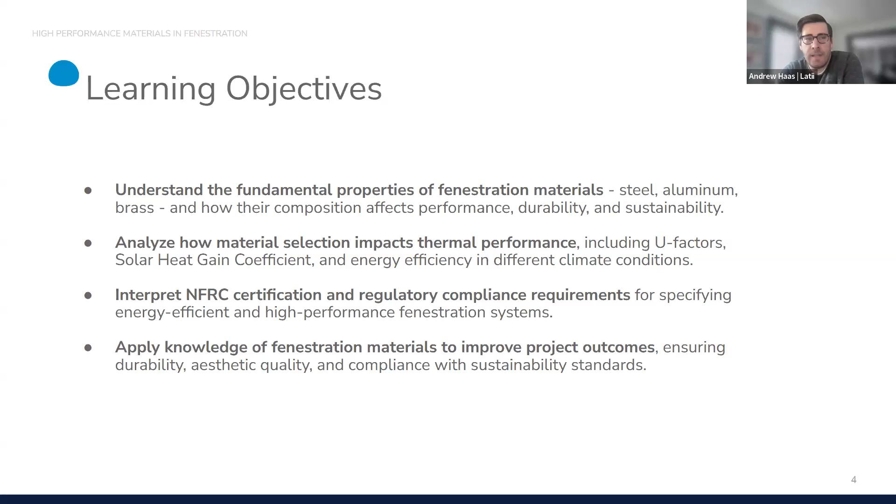We're going to interpret NFRC certification and go through what that means and what's measured for being compliant. And then we're going to look at how you can apply this knowledge to improve project outcomes within your designs. So why metal fenestration?

It really is an amazing thing to have metal windows and doors in projects. It's something that's different than other materials because they age and patina with time, and it really changes and grows, or changes its appearance and feel over time through the life cycle of the building.

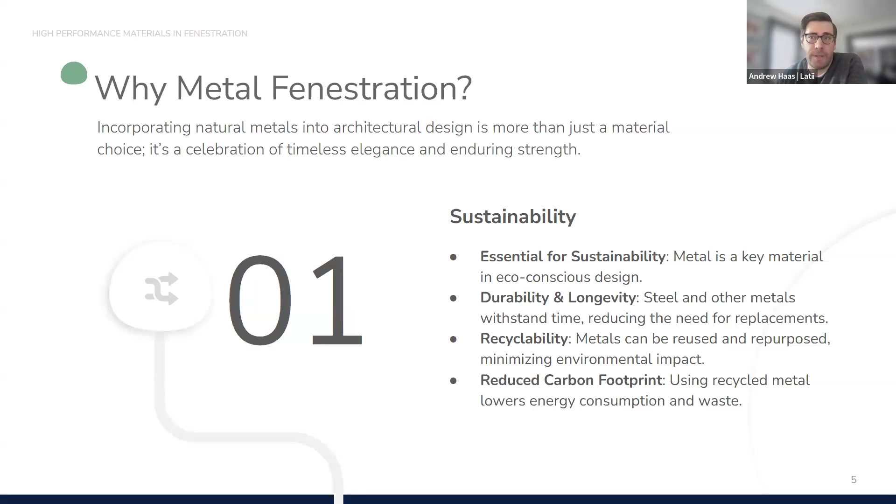So it's a really great material because it can be an eco-conscious design for sustainability. It's very durable and has a long longevity. It's highly recyclable, and by using recycled metal in our products, we reduce the carbon footprint that they have. They're also very beautiful.

There's kind of a dynamic aesthetic that evolves over time throughout the whole project itself. So on one side of the building, it might age and look a little bit different than on the other side of the building, which is kind of a romantic and nice aspect of the patina over time.

It offers consistent performance, so its uniform composition ensures reliability across applications, and natural metals blend beauty with durability, meeting the highest standards of craftsmanship.

It's also naturally corrosion resistant. They develop a protective patina over time that enhances the durability and aesthetics of the project.

It has long-term integrity. It doesn't crack or warp or deteriorate with age like other materials. It's very low maintenance while maintaining its structural performance, and it becomes more robust and beautiful over time.

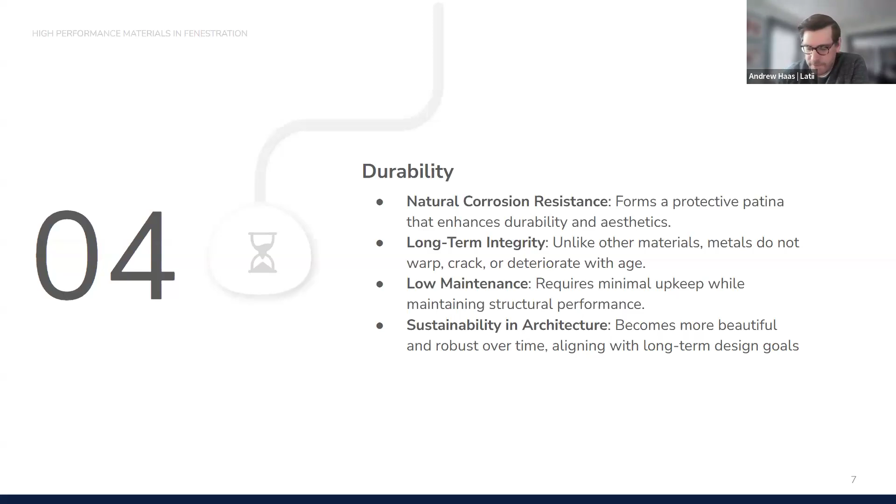Steel is known for its exceptional structural strength and high load bearing capacity, making it ideal for large window and door openings. You can see here the MAXXI Museum made with Secco materials in Rome, Italy by Zaha Hadid.

Its high tensile strength ensures that it can support heavy loads. It allows for thinner profiles compared to aluminum and brass, which maximizes the amount of glazing area without compromising structural integrity. Its rigidity makes it particularly useful in high wind zones or seismically active regions where material flexing can be problematic.

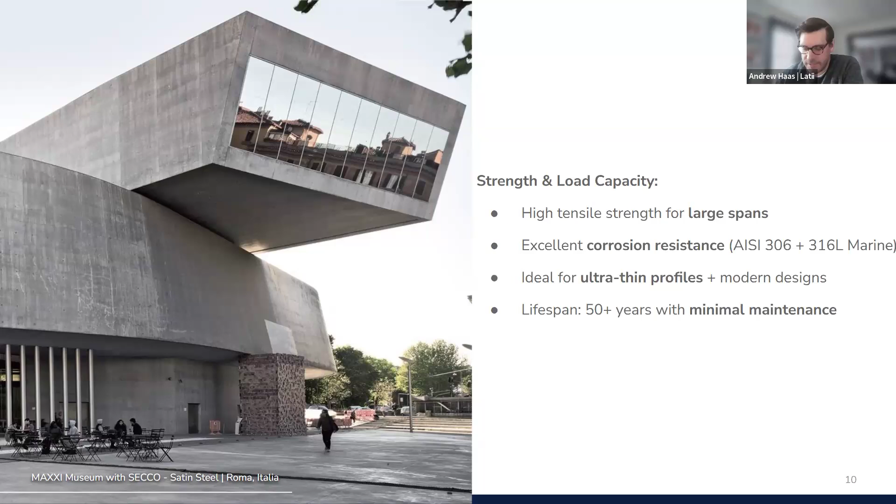Looking at the composition of steel, it's a dense and heavy material, typically weighing 2.5 times more than aluminum. Due to its weight, it requires reinforced structural support for installation, making it less suitable for projects where lightweight construction is a priority.

However, the weight results in higher transportation and handling costs compared to aluminum, requiring a more labor-intensive installation process.

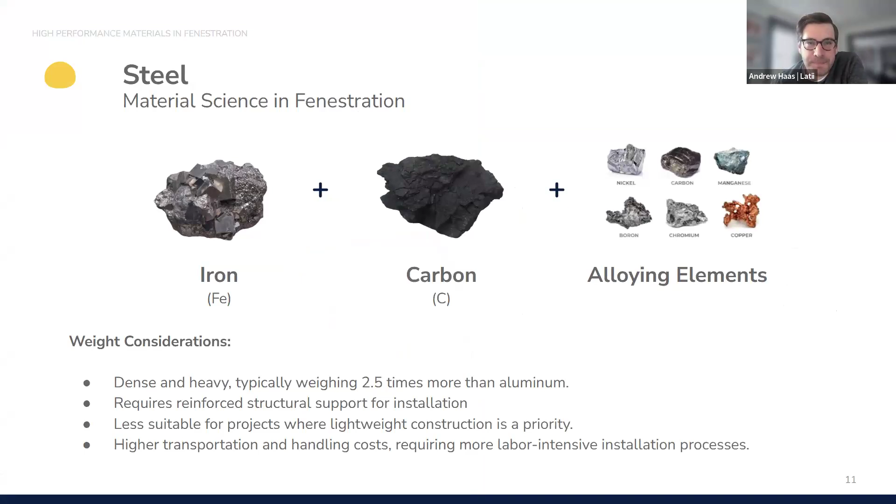Steel is highly durable. It often lasts for more than 50 years if properly maintained. It's corrosion resistant - all the products we offer are galvanized and powder coated or stainless steel to prevent long-term deterioration.

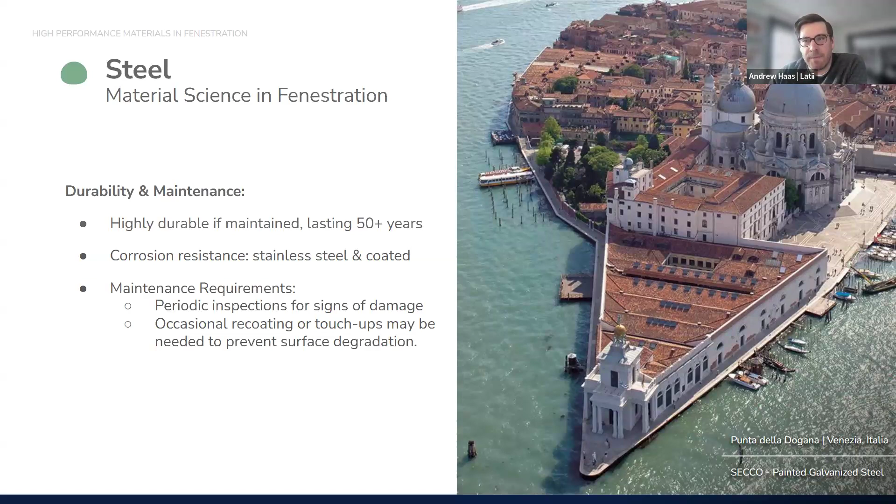Steel windows and doors sometimes require periodic inspections, particularly in coastal and humid environments where salt exposure can cause damage. Coated and stainless steel options reduce maintenance requirements, but there's some occasional recoating or touch-ups that may be needed to prevent surface degradation.

So steel strength offers large vistas to the outdoors, blending domains between spaces and lighting up the room with life and beauty.

Next, we'll move into aluminum. Here's a project by Francisco Artigas - this is our showroom down in Mexico City that was renovated a few years ago with all of our aluminum products.

Aluminum offers moderate strength, which makes it suitable for most standard window and door applications, particularly in residential or low-rise commercial settings. It's not as strong as steel, so it can't support as much weight without reinforcement.

To compensate, aluminum systems often incorporate additional structural elements or thermal break reinforcements like what we offer, especially for large spans in buildings. Because of its lower strength to weight ratio, aluminum tends to require slightly larger framing, but it still doesn't largely impact sight lines like other products do.

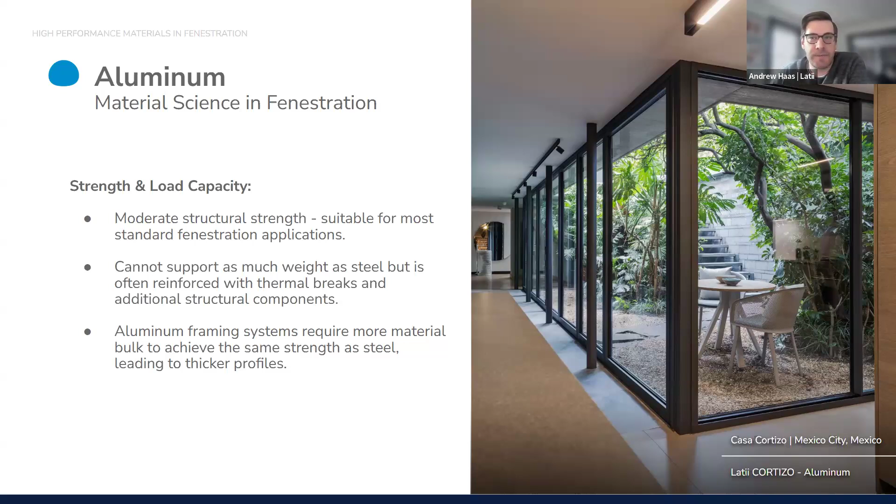So aluminum is extremely versatile. It's important to understand the trade-offs between profile size and structural capacity, which our team can help you with throughout the design process. A little bit about the science of aluminum.

There's some big advantages to its lightweight nature, especially compared to heavier metals like steel and brass. Because it's so much lighter, it's easier to transport, handle on site, and install, which translates to savings in both labor and time.

It also reduces structural load demands, making aluminum ideal for retrofit projects or historical preservation projects where weight may be a concern. Additionally, reduced weight can mean lower shipping costs and faster installation times.

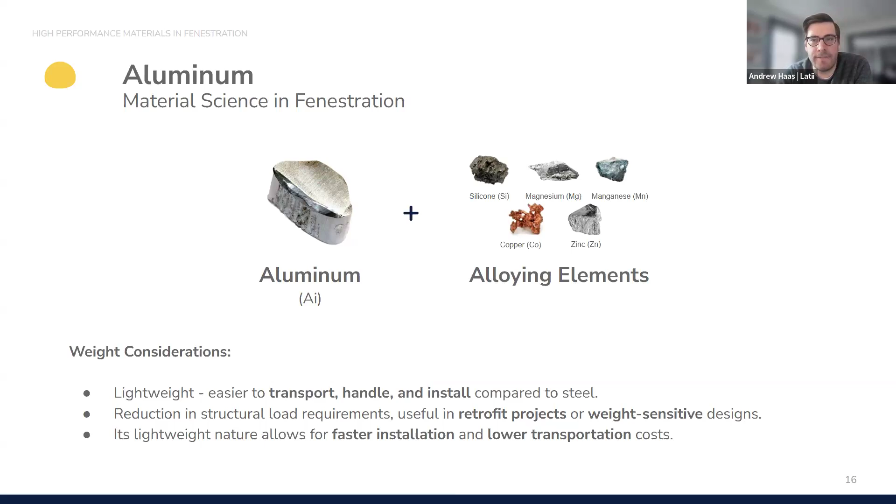Aluminum is naturally corrosion resistant. It performs or forms a protective layer when oxidized to the air, or when exposed to the air, preventing rust and expanding its lifetime. The lifespan of aluminum is typically 30 to 40 years, with minimal maintenance required.

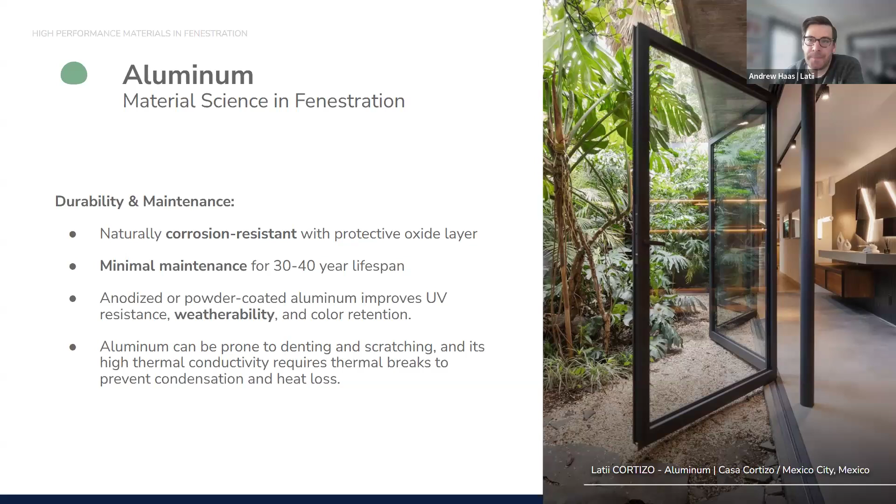Surface coatings are typically anodized or powder-coated aluminum, which often improves UV resistance, weatherability, and color retention. The only real maintenance needed is occasional cleaning to remove dirt and environmental pollutants that may have attached to it. One other consideration is that aluminum can be prone to denting and scratching, so that's important to consider.

And now looking at brass, here's the Venice Hotel made with Secco brass products. Here's the interior, you can see it's a polished brass.

Brass sits between aluminum and steel when it comes to structural performance. It's stronger and more rigid than aluminum, giving it better dimensional stability, especially for custom or intricate profiles. However, it doesn't match the load-bearing capacity of steel. Brass really excels within specialty projects that demand both performance and high craft. You'll most often see it in historical preservation projects, premium architectural accents, and decorative detailing for high-end residential, luxury retail, and cultural projects. Brass is a great material because it combines longevity, strength, and elegance, balancing both aesthetics and durability over time.

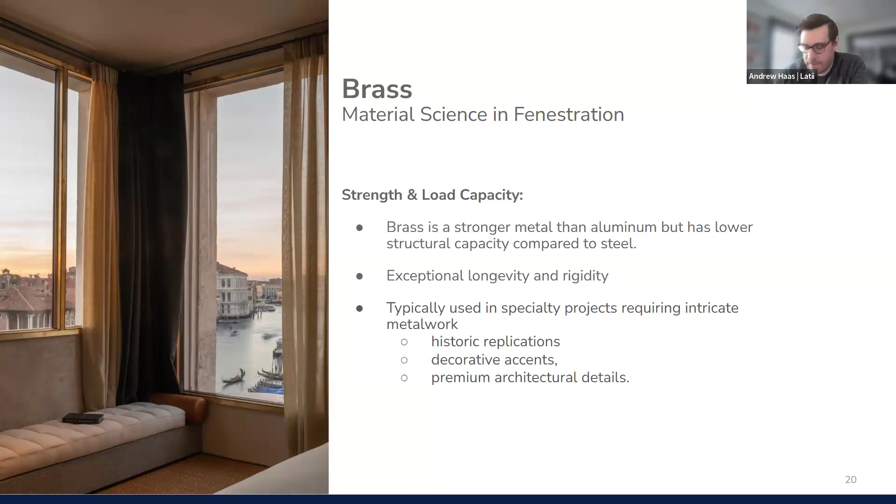A little bit about the chemistry of brass: it's heavier than aluminum, but slightly lighter than steel. Because of this, larger window and door assemblies in brass require additional structural support, which our teams can help with. Brass is typically made of about 67% copper and 33% zinc. So while brass adds a bit more weight and complexity to installation, it offers great longevity and aesthetic quality and character in projects.

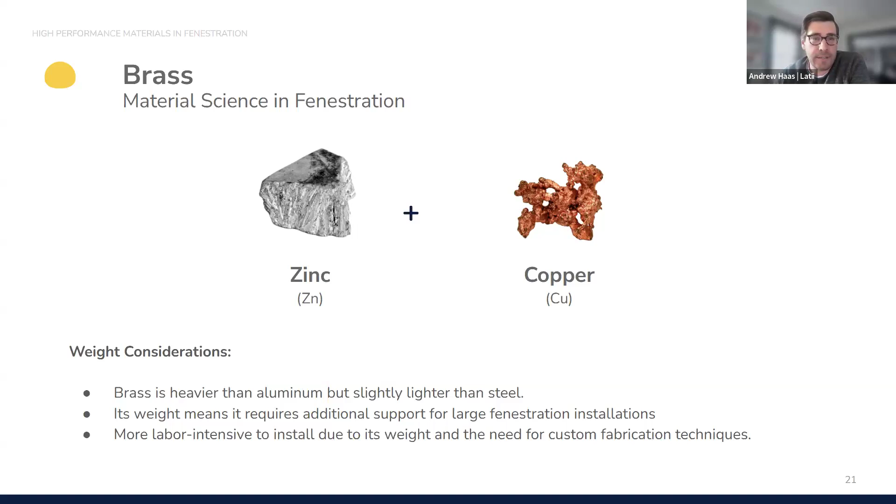Brass is one of the most durable materials available for architectural fenestration. Its performance really lasts and shines over time. It offers exceptional corrosion resistance, which is great for coastal or high humid climates. One of the great characteristics of brass is how it patinas over time, developing a rich surface that enhances its appearance while also acting as a protective layer, shielding the metal from environmental wear. So in many ways, the patina is a great feature, not really a flaw.

Brass is also very low maintenance. It doesn't need to be painted or coated. And there are different looks you can achieve, whether it's bright and polished, or if you like the burnished patina over time.

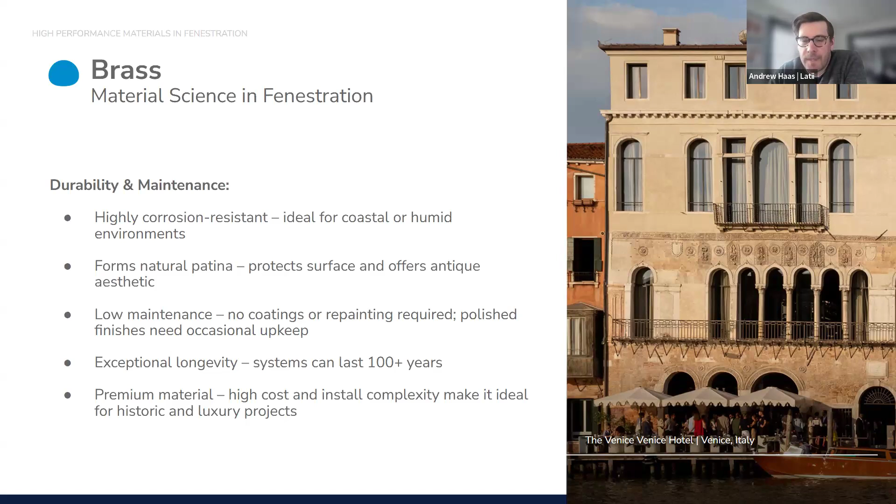Brass windows and doors can last for over 100 years with minimal intervention or upkeep needed. It's a really long-lasting building material for premium projects. It is a luxury material with high upfront costs, but the longevity of the material reduces its need to be replaced over time.

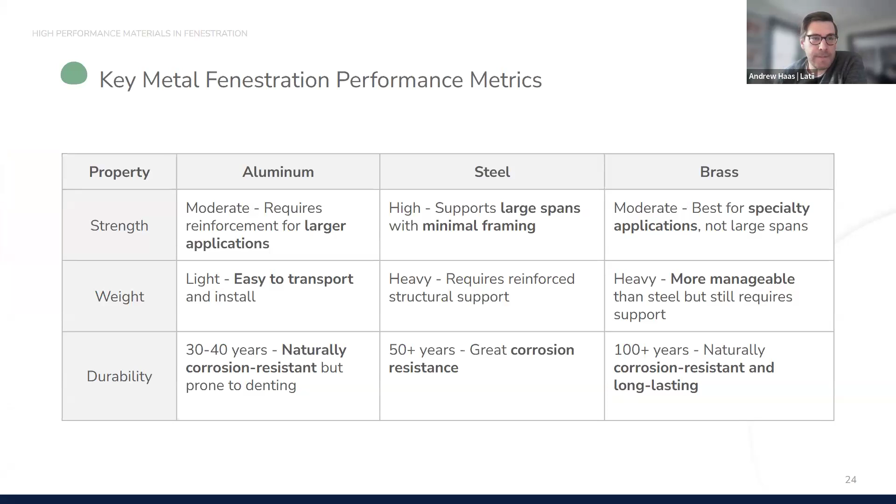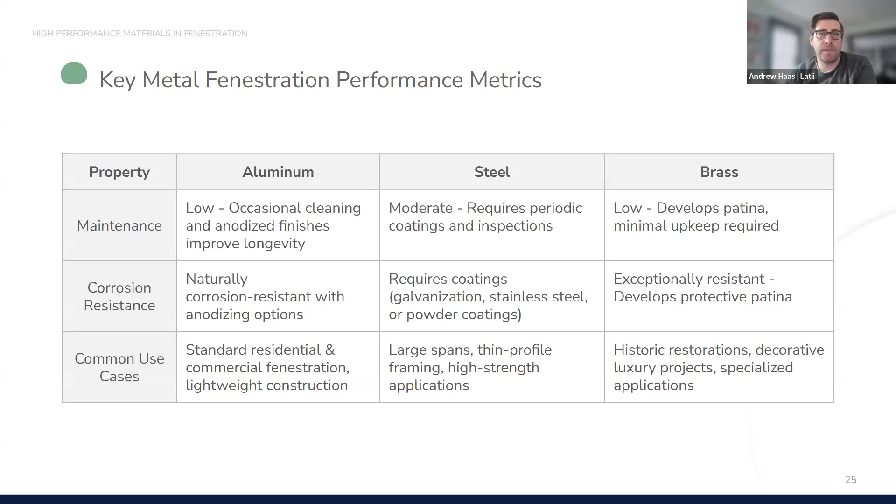Just some key performance metrics to consider: all of these materials excel in different ways, whether it's steel for very large spans with minimum framing, aluminum, which is great for weight-conscious projects and ease of installation, or brass, which is great for corrosion resistance and long-lasting performance. They all have different maintenance properties and corrosion resistant properties, so there are a lot of different common use cases for these different types of materials.

So let's look at the life cycle analysis and sustainability of these materials. Steel performs really well in aspects of its recyclability. It's 100% recyclable, and there's a well-established global recycling infrastructure for handling and reusing it as a building material. Recycling steel offers significant energy and carbon savings compared to producing new steel from raw materials.

Using recycled materials requires about 75% less energy than raw material. Steel has a very high strength to weight ratio, making it very strong, so less material is needed to achieve the same structural performance. It helps optimize resource use by reducing both material consumption and transportation emissions. It still carries a moderate embodied carbon impact, particularly during its initial production, but this carbon is typically offset over its long lifespan, since the windows can last for 50 years or more, requiring less replacement.

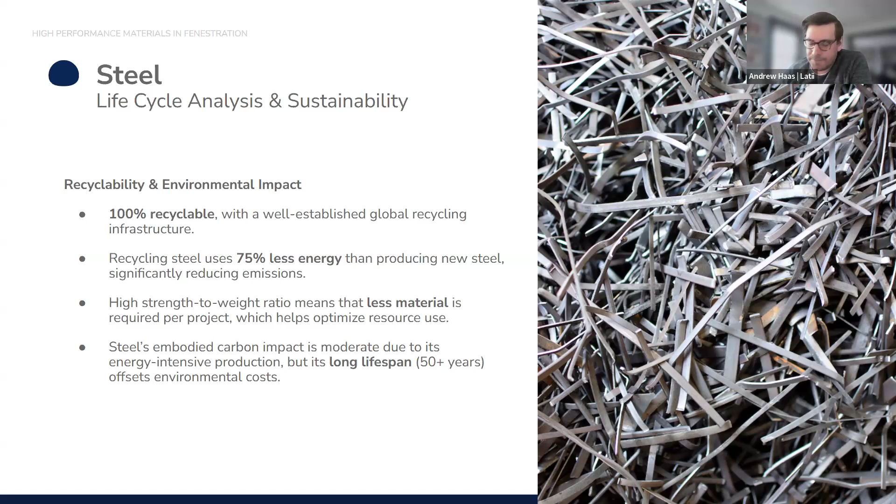For its embodied carbon considerations, steel can have a significant footprint in the initial production stage, but most steel is commonly recycled from scrap materials, and when using scrap materials, it can reduce emissions by more than 50%.

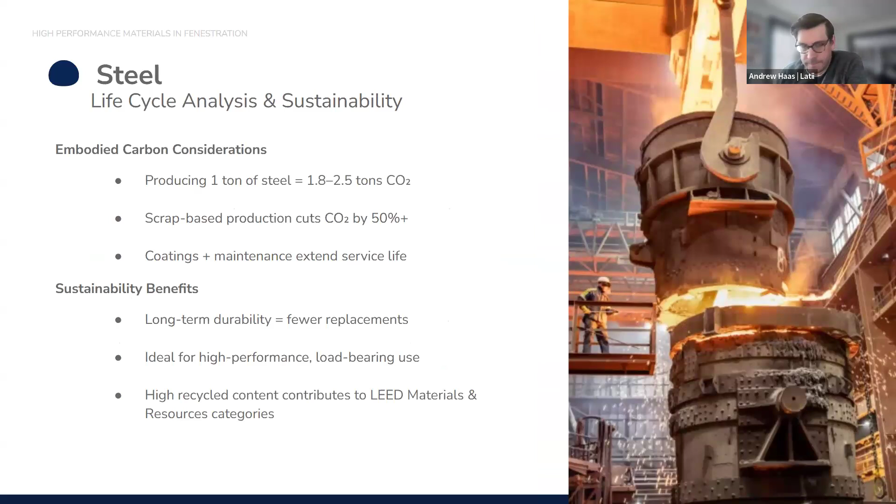Looking at aluminum, it's also one of the most sustainably recycled materials in the built environment, especially for facade and fenestration systems. Roughly 95% of aluminum used in buildings is recycled at the end of its life. The great thing about aluminum is that recycling it only uses about 5% of the initial energy required to produce it from raw materials, saving 95% of the energy needed.

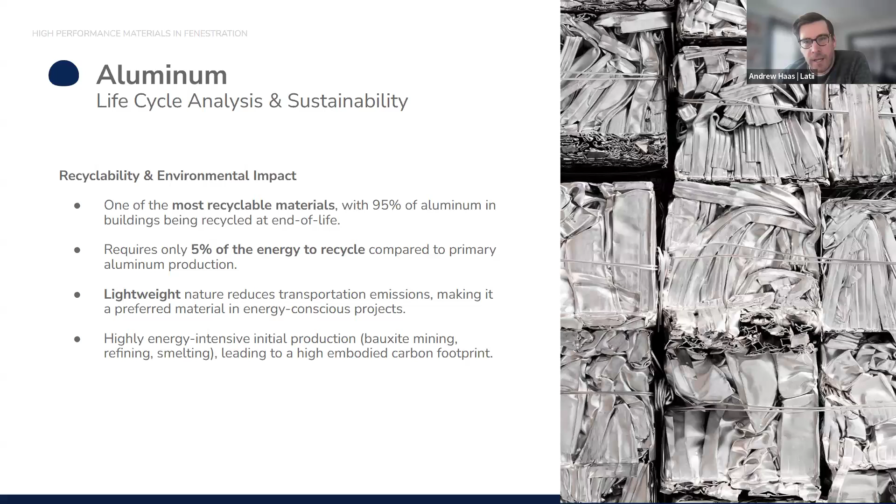Its lightweight nature also contributes to reduced transportation emissions, and it's one of the best materials for long-term environmental impacts.

Raw aluminum has one of the highest embodied carbon footprints among materials. Producing just 1 ton of primary virgin aluminum emits roughly 8 to 12 tons of CO2, so it's a lot more than steel or brass.

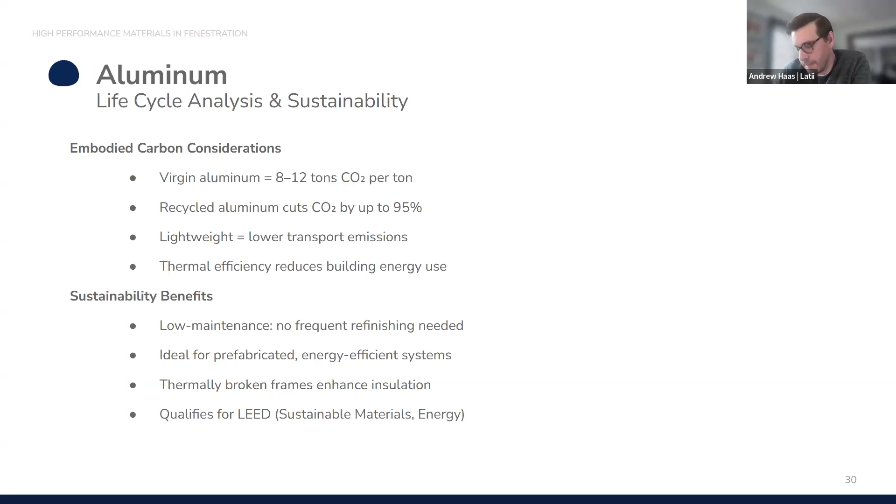It's very lightweight in nature, reducing the consumption of fuel for transportation, and typically having them be thermally broken also increases its strength, so you can reduce the amount of material needed.

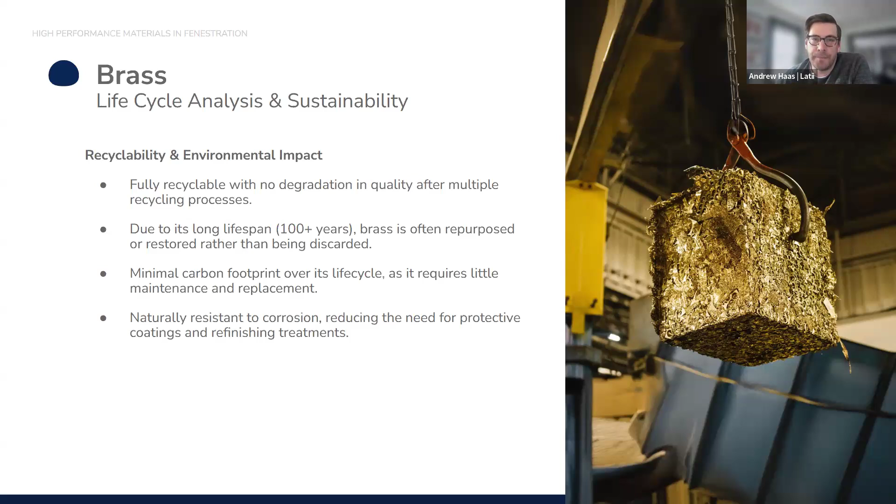Brass is a highly sustainable material when you look at its full life cycle performance. It's fully recyclable with no loss of quality, even after multiple recycling cycles, making it really suited for high reuse. Because it's so durable, a typical lifespan can be 100 years or more, and it's often repurposed or restored rather than discarded. The life cycle carbon footprint is relatively low, with a long service life and low maintenance needs. Since it's also highly resistant to corrosion, it reduces the need to repair and replace.

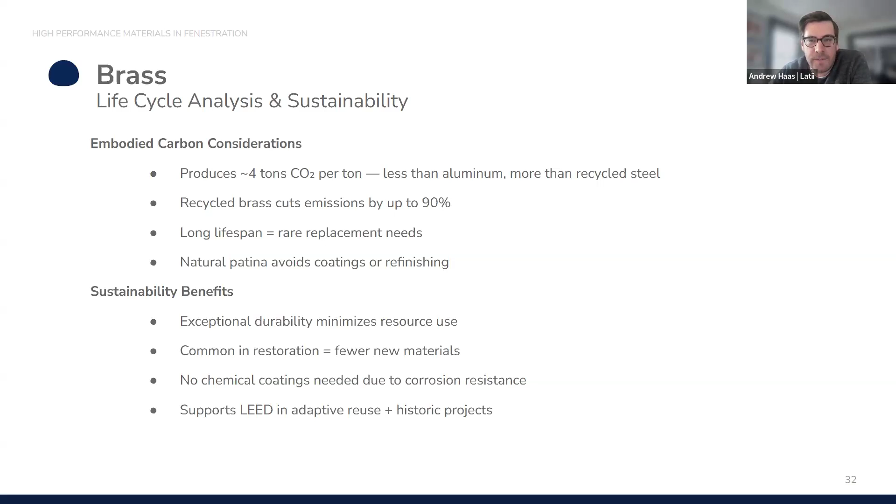Some embodied carbon considerations: it emits 4 tons of CO2, significantly less than aluminum, but still more than steel. It's highly recyclable and highly durable. Its natural patina helps protect it, and the aesthetic aging process reduces the need to replace it over time.

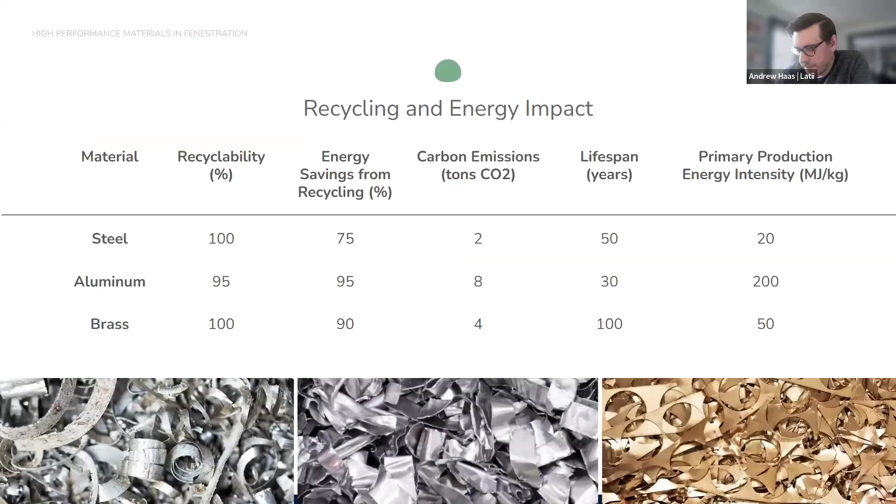Looking at them all, they have some similar characteristics. Steel is 100% recyclable, aluminum is roughly 95% recyclable. So there are a lot of different trade-offs and considerations for the sustainability aspects of these products.

Looking at energy efficiency and building performance now, fenestration is one of the most impactful elements of the building envelope when it comes to thermal performance, often accounting for 30 to 40% of the building's total heat loss or gain. If these systems are poorly designed or installed, HVAC systems have to work harder to compensate for this energy loss, leading to higher energy bills.

You can get condensation, and occupants can experience drafts or thermal discomfort if the fenestration isn't properly spec'd or installed. So material selection and proper frame detailing with thermal breaks can help increase the performance of these systems.

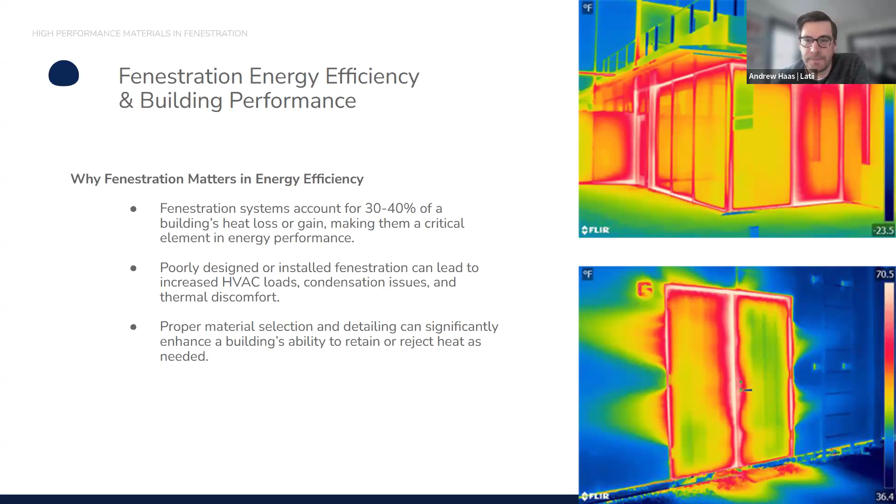Looking at the conductivity of these materials: steel has high thermal conductivity, which means it transfers heat easily. On its own, it's a poor insulator, but our systems all have proper thermal breaks, which help make it more energy conscious. Aluminum is also a very conductive metal, typically paired with insulated glazing units and advanced low-E coatings to manage thermal transfer and reduce energy loss. Brass performs moderately - it's more conductive than insulated materials, but less than steel or aluminum. It also offers some passive thermal stability.

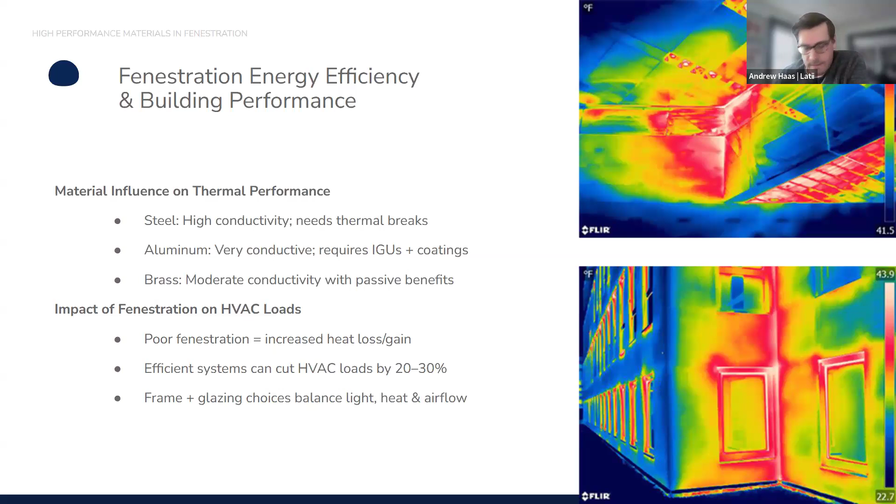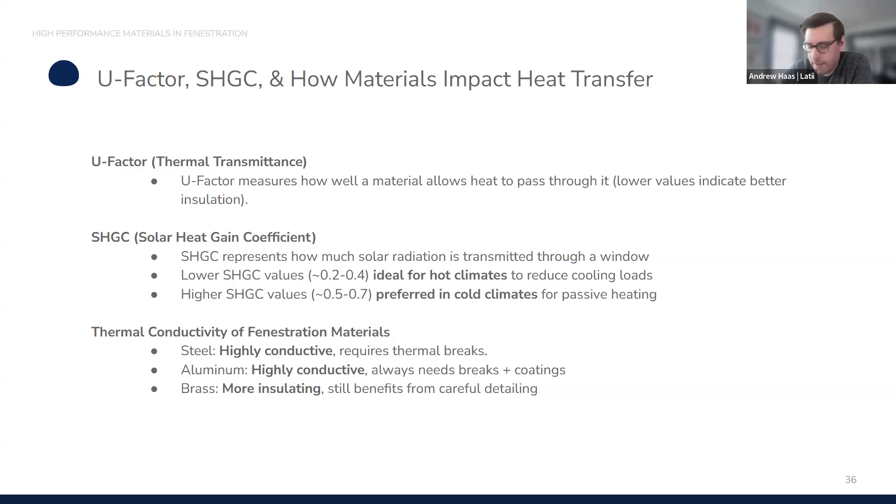Looking at the terminology we'll be talking about, first we're going to look at U factor - this is like thermal transmittance, so it measures how well a material allows heat to pass through it. We're also going to be talking about solar heat gain coefficient, which represents how much solar radiation is transmitted through the window. And then lastly, thermal conductivity - looking at how conductive these materials are with energy.

One of the great things that the Lati products offer is they're all thermally broken windows. Thermal breaks are low conductive materials that are inserted between the metal frame sections to reduce heat transfer from one side to the other. It's essential for steel and aluminum, and we also have it in our brass systems as well.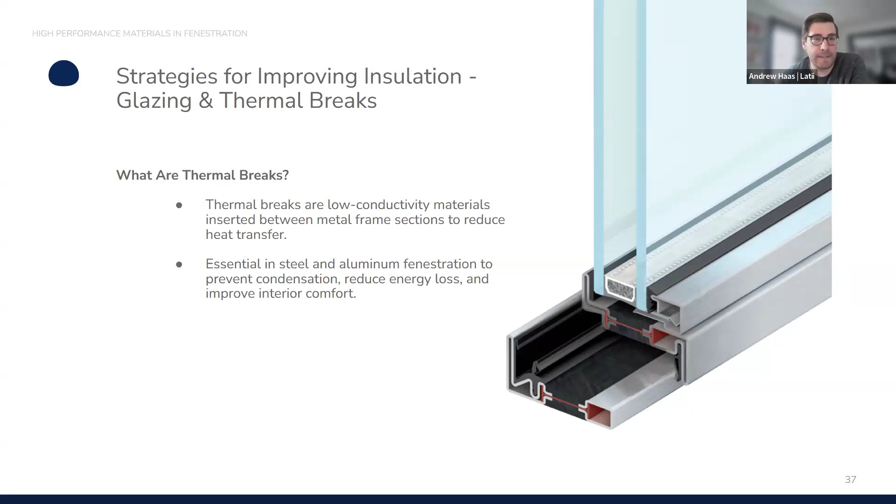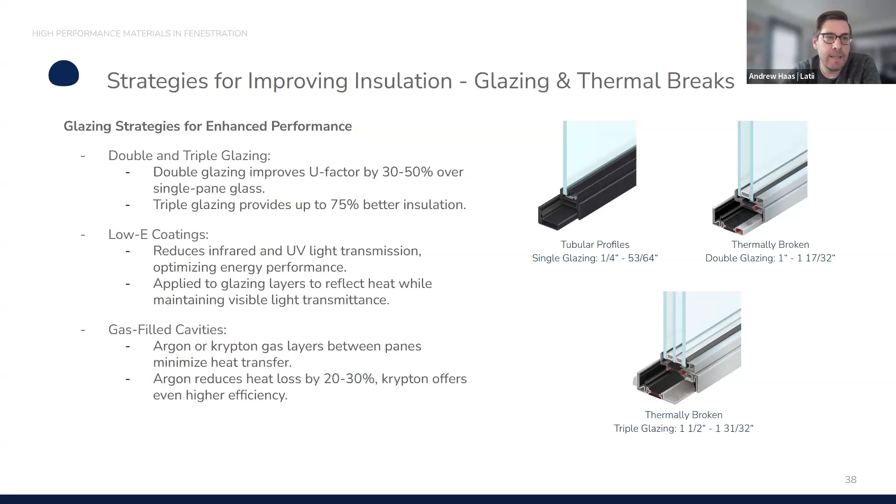Another strategy for thermal performance is looking at glazing strategies. We offer single, double, and triple pane options for glazing. We also have low-E coatings that reduce infrared and UV light transmission, and we also have different gases that are filled in depending on the performance requested by the architect.

Now we'll go into NFRC certification ratings and why it's important. The NFRC ratings are set up by the National Fenestration Rating Council, which organizes and sets standards for performance ratings for fenestration - windows, doors, and skylights. It's independently verified, required for Energy Star labeling, and widely recognized by programs like LEED and Passive House.

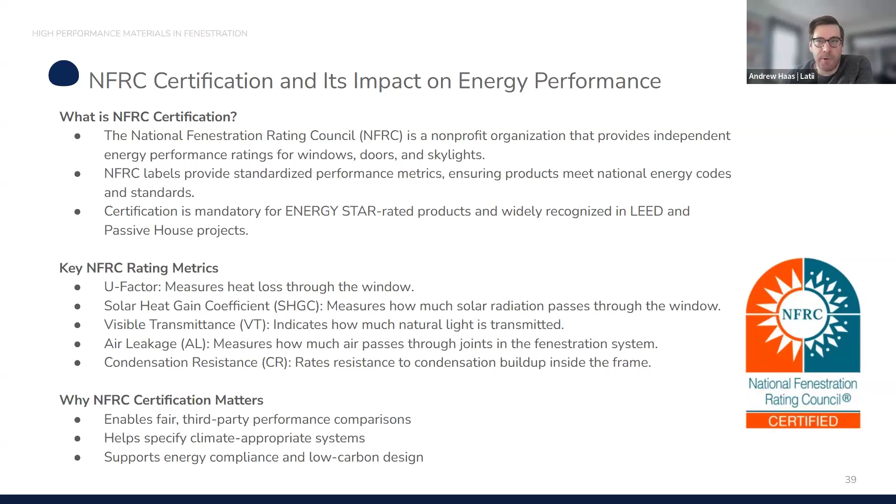So how do you break down what the label is saying? When you're looking at the U factor, lower numbers mean better thermal insulation. When you're looking at the solar heat gain coefficient, you want to see what's best for the climate you're building in. For visible transmittance, we're looking at how much daylight passes through the window. And then air leakage indicates how airtight the product is.

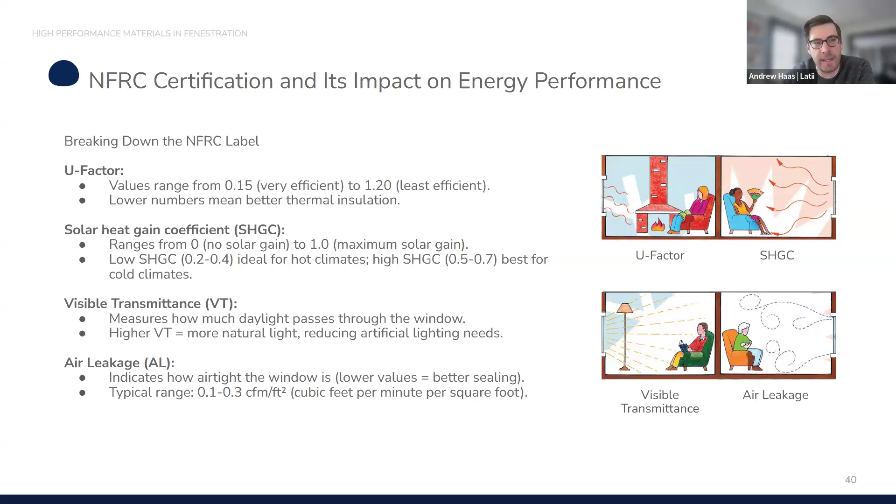So there's different zone considerations based on where your project is being built. In a northern zone, your goal is to primarily retain heat in the winter and take advantage of passive solar gain when possible.

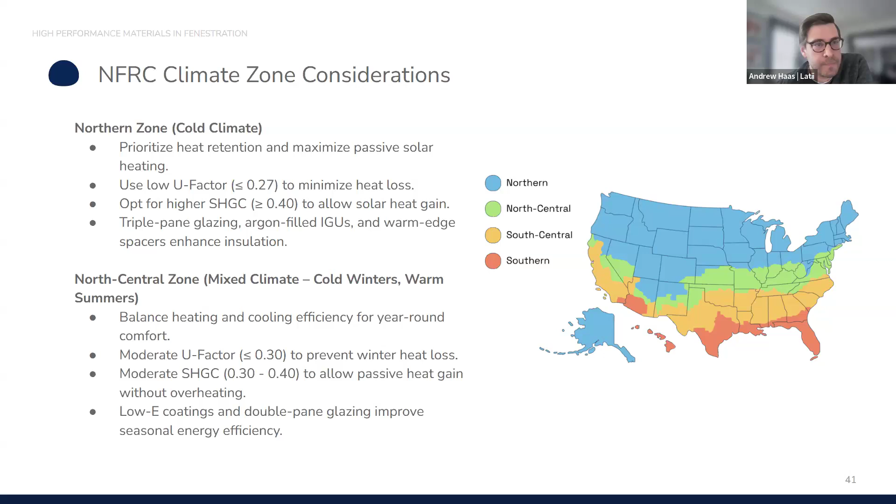For the north central zone, it's more balanced with cold winters and warm summers, where fenestration needs to perform well year round. In the south central zone, you have intense summer heat while still needing enough insulation for milder winter months. And for the southern zone, the climate can be both hot and humid, often year round.

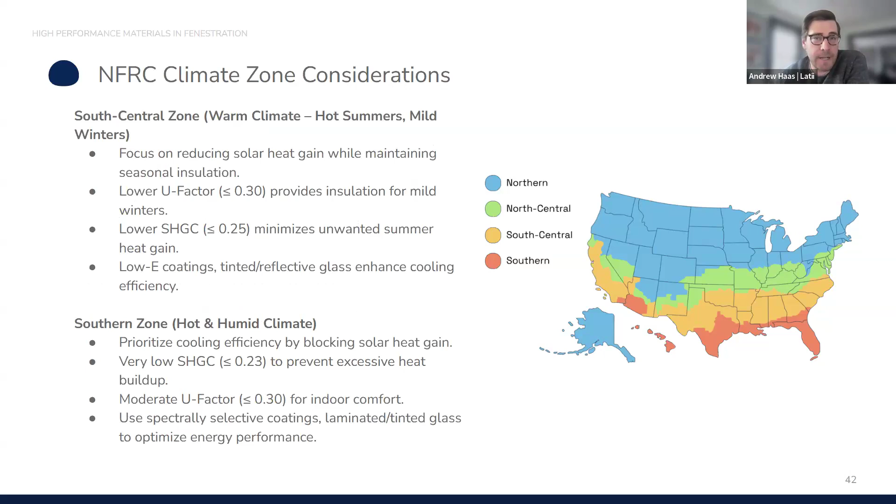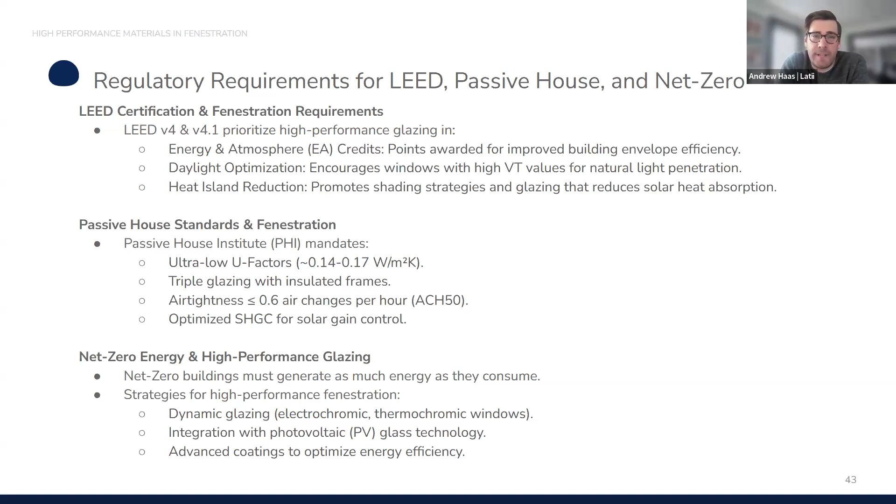Looking at the regulatory requirements for LEED, Passive House, and Net Zero, there are aspects you can consider for energy and atmosphere, daylighting optimization credits, visible transmittance, and heat island reduction.

Now, what's the best practice for selection of these materials? The first would be trying to understand aesthetic and design intent. For steel, sightlines offer thin, slight profiles and large spans, making it great for modern and historical preservation projects.

Aluminum is lightweight, corrosion resistant, and available in a lot of different finishes, making it great for high-rise and commercial buildings. Brass has a distinctive luxury aesthetic that ages over time, which is great for historic preservations, high-end residences, and luxury retail.

When looking at structural performance and load considerations, steel has the highest load-bearing capacity. Aluminum is moderate in strength but can be reinforced for larger spans if needed. Brass is durable and heavier than aluminum, which requires proper surrounding support.

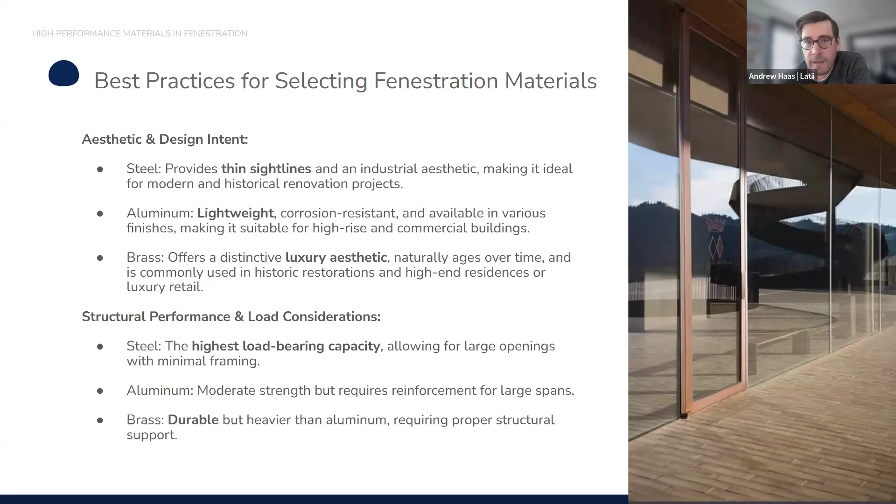Looking at environmental conditions and climate suitability, coastal environments require high corrosion resistance, so stainless steel, anodized aluminum, or brass work best. In extreme climates, you want to use high performance glazing as well to reduce heat transfer and increase longevity.

All of our steel products are AISI 306 and 316L marine stainless steel, which offer very high corrosion resistance. Aluminum is also naturally corrosion resistant, but can benefit from being anodized or powder coated. Brass develops a great patina over time, reducing its maintenance, but might require other upkeep if you want to keep it polished and bright.

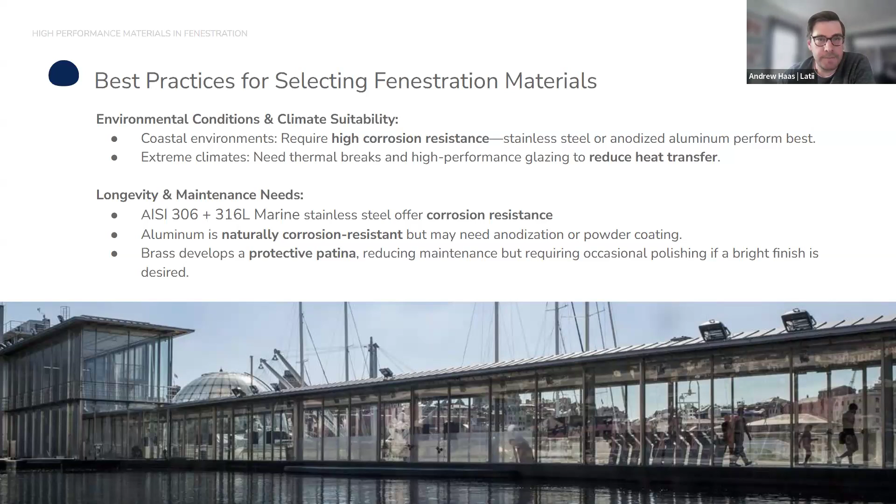All of these are a balance between design and budget constraints. For luxury residential projects, brass or steel are often used for the aesthetics, which come with a higher upfront cost, but the trade-off is long lifespan and minimal maintenance, which can help offset this over time.

For commercial applications, aluminum is usually the dominant material due to its cost efficiency and adaptability. For renovation and adaptive reuse projects, steel and brass offer the ability to match historical details with modern high performance.

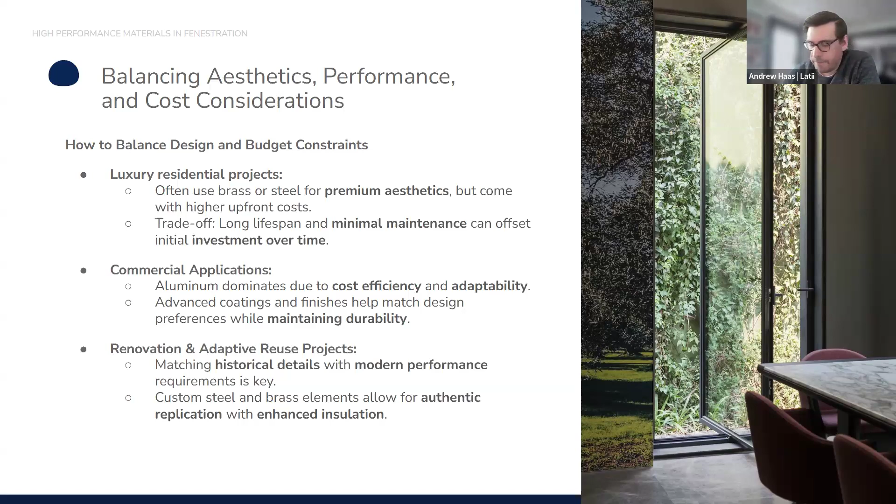Lastly, performance versus life cycle costing. As we said before, higher initial investment in durable materials like steel and brass can result in lower lifetime costs. Lower cost materials like aluminum may require periodic refinishing or replacement, increasing long-term costs.

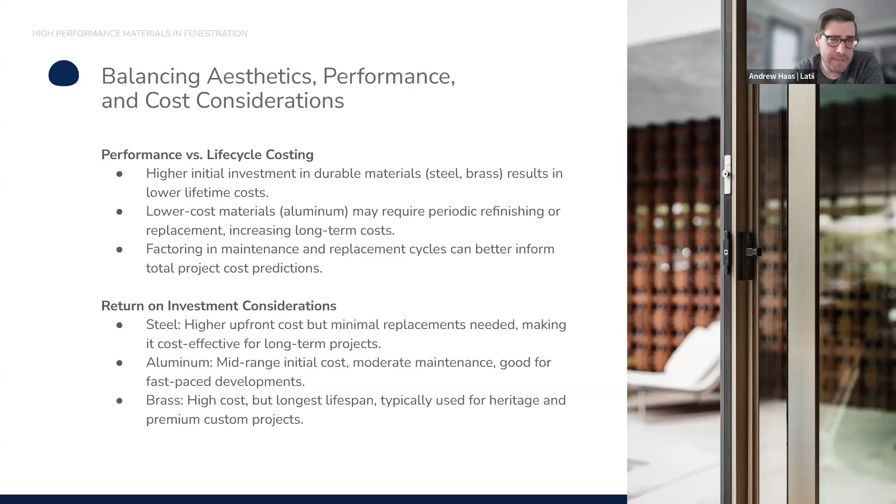You can factor these replacement cycles in to better understand the total projected cost of a project. For return on investment, steel has a higher upfront cost but minimal replacement is needed. Aluminum is mid-range cost with moderate maintenance, good for fast-paced developments. Brass is high cost but has a very long lifespan, typically used for heritage and premium custom projects.

So all of these materials have some key takeaways to think about: material selection matters, as there are strengths, trade-offs, and disadvantages between all the different materials. NFRC certification ensures compliance and makes sure that your materials and doors are meeting regulations.

Thermal performance and energy efficiency are essential for successful projects, helping reduce energy costs and increase performance. And sustainable and life cycle considerations come from choosing materials that are made with recycled content or can be easily recycled after the lifespan of a project.

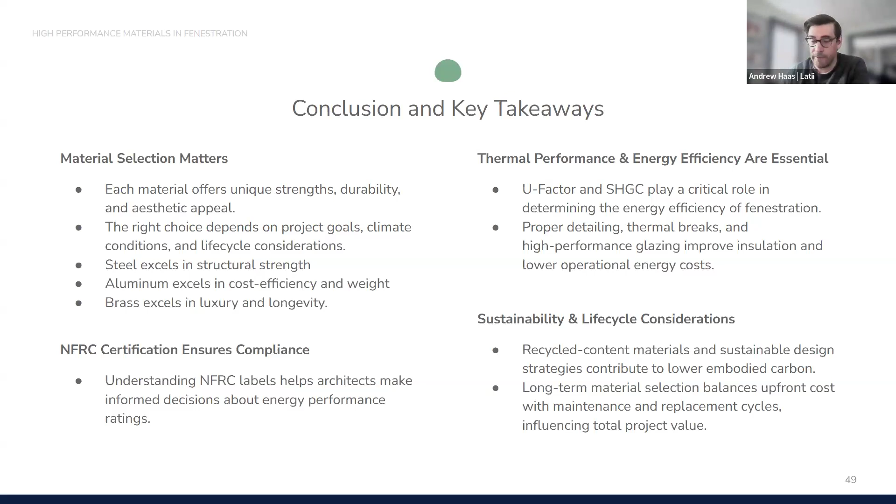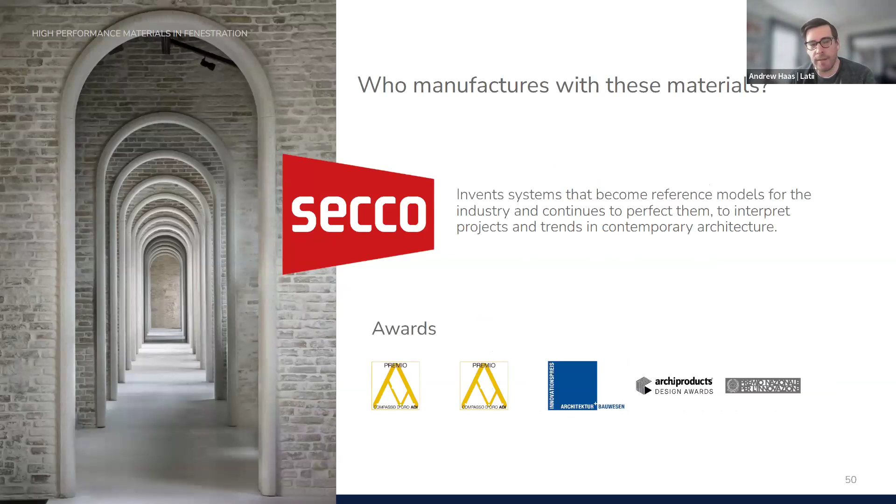So now we're going to go into what Lati offers and the materials that we have. All of our materials are made by a company called Secco, Secco Sistemi. They are based out of Italy. They make all of our profiles, and then we fabricate those profiles. They've been around for over 70 years.

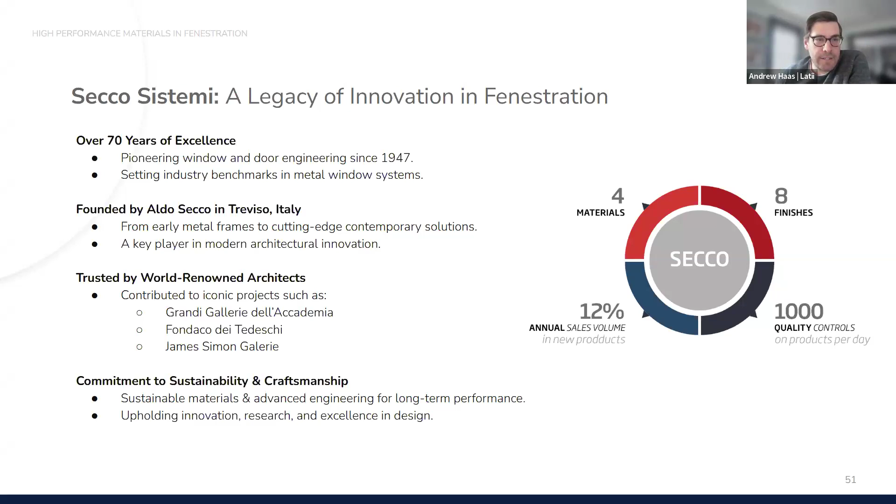They're used by lots of different architects on very high profile projects, and the profiles are made with sustainable materials, and the advanced engineering really allows for high performance in projects. So with these profiles made by Secco, we have two brands.

One is Bella Vista. That's where our steel and brass line comes from. It's constructed with Secco Sistemi profiles made in Italy. And then we have Spazio, which is a high performance aluminum line constructed from Cortizo profiles in Spain.

So first we're going to look at our steel line from Bella Vista. Bella Vista is really great at offering a unique design with minimalist and contemporary looks. They're very energy efficient because of our thermally broken profiles and insulated glass.

They're very, very high quality, and there's really unmatched value. We produce and manufacture all of our windows in Portugal and Morocco, which offers modern technology in its fabrication, but old world finishing in the craftsmanship of how they produce the windows.

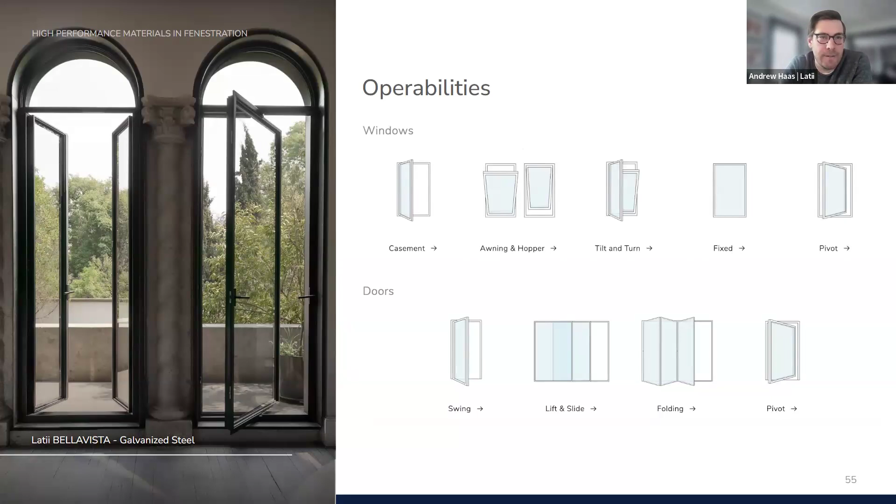We offer a wide range of operability, allowing for architectural visions to not be limited or compromised. And we have different profiles for different types of projects for thickness and size of window.

The first one would be our Bella profile, which is the thinnest and most minimal, offering the advanced thermal breaks that I mentioned to reduce the amount of impeded vision from the inside to the outside. So you can see the different thicknesses with the different number of glazing panels that we have.

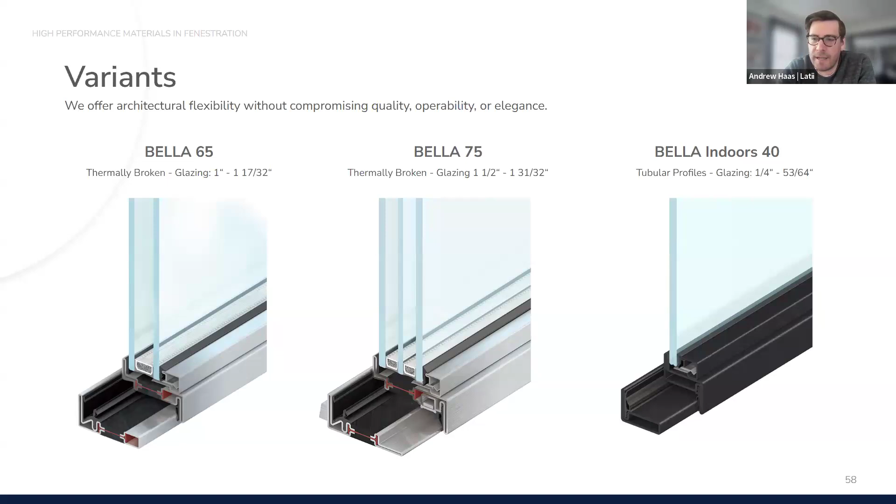For our Bella 40, that one's used for indoors, typically for high-end luxury apartments and hotels for things like their gyms or spas or shared co-working spaces, things like that.

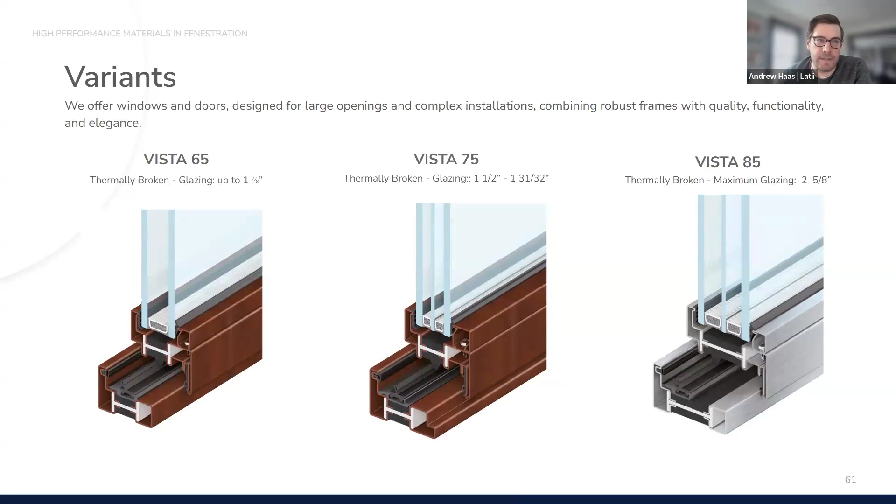Next is our Vista profile, which is a little bit bigger, but it offers top tier thermal efficiency. So you can see the different thicknesses of each of these variants in the windows.

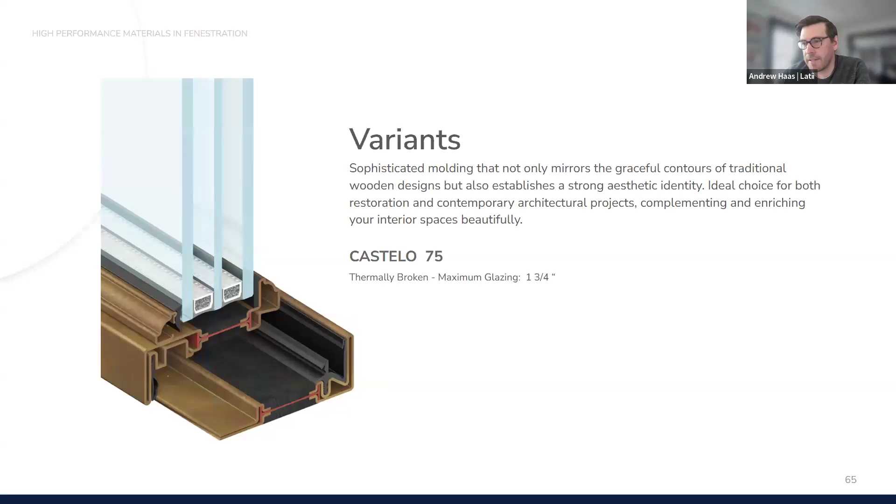The Murano offers different beveled profiles for a slightly different and more refined look. And then the Castelo has Gothic profiles, which offer a higher level of detail for certain projects that might want those sort of profiles. Looking at materials and finish...

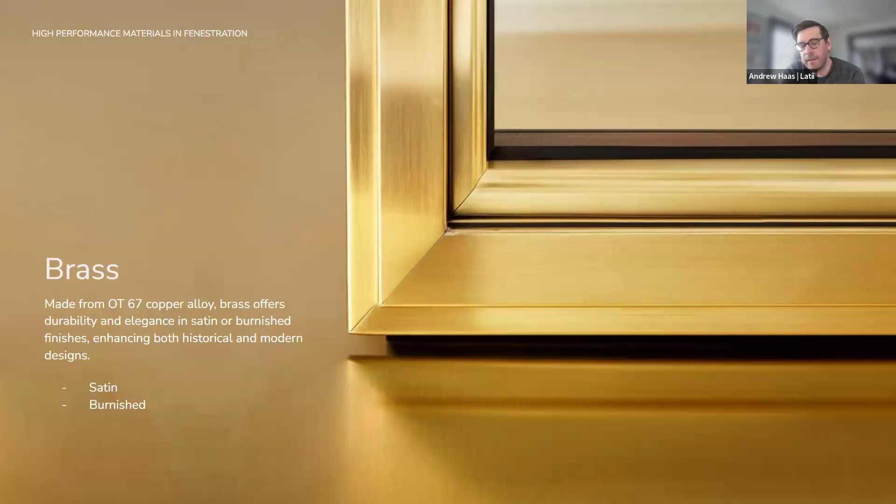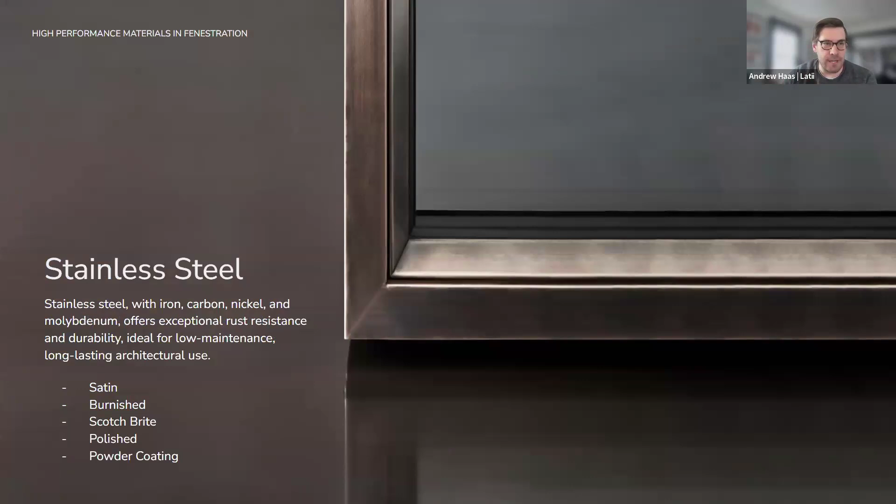This is our polished, our satin brass material, which can also be burnished. Stainless steel, we offer in a satin finish, a burnished finish, a Scotch Brite, which is a slightly brushed finish, polished, and then we offer in powder coating.

We also offer Corten steel, which is an amazing product to see. It's really beautiful, and it also has some changes in it over time, which go with the longevity and life of the building.

And then probably the most common use that we often see is powder coated galvanized steel with a large variety of colors, and we can do our best to do color matching as well if you need it for replacement or for renovation projects.

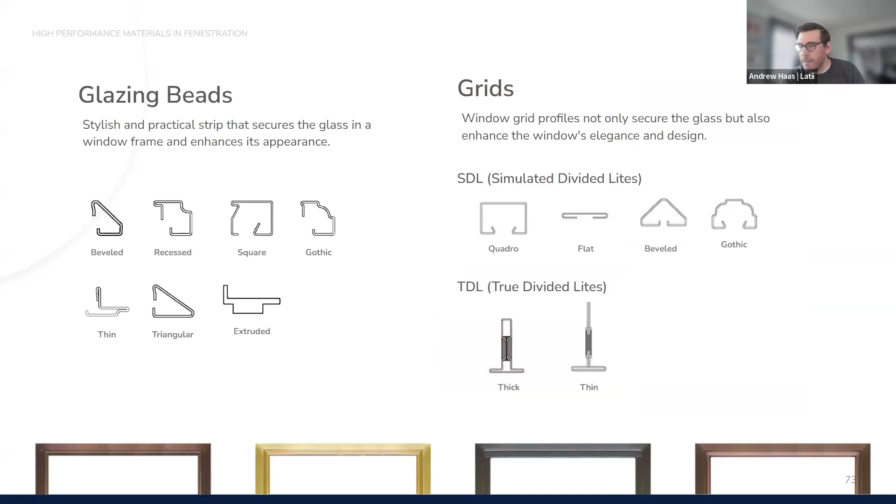We also have a line of accessories. We have all of our door and window handles that are available in all of the finishes that we just went through, as well as a lot of different types of glazing beads to help accent looks that you might want for your projects.